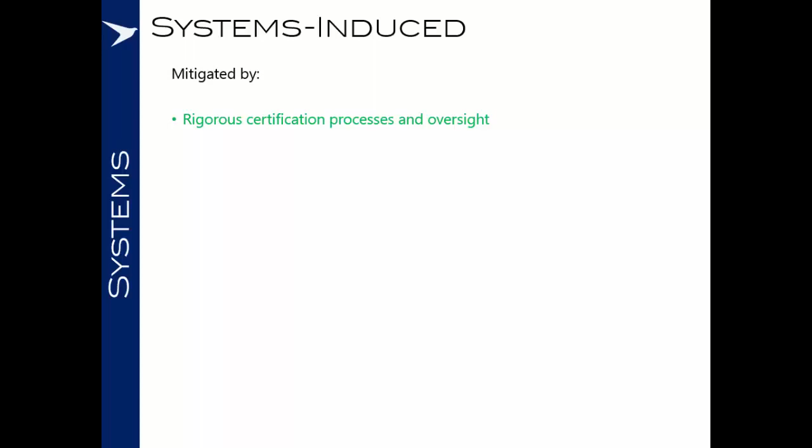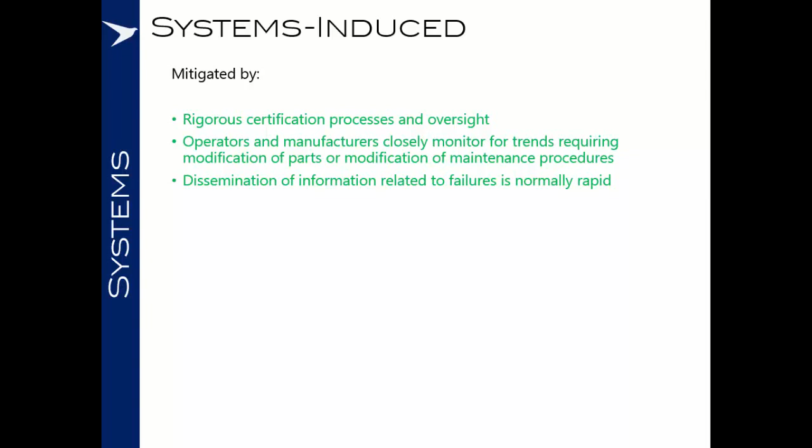Let's now look at the systems-induced causes of upsets. This is where there's something wrong with the aircraft or its systems, and it's led to a condition where an upset can occur. Now these are becoming increasingly rare and are mitigated by a rigorous certification process and a lot of oversight from regulators and aircraft manufacturers. Additionally, operators and manufacturers closely monitor for trends requiring modification of parts or maintenance procedures, and the dissemination of information related to failures is normally pretty rapid.

However, it is a fact of life that failures still occur, and whilst they do, most are survivable if correct actions are taken. So in this section, we'll have a look at flight instrumentation failures, auto flight systems failures, and flight control systems failures and anomalies.

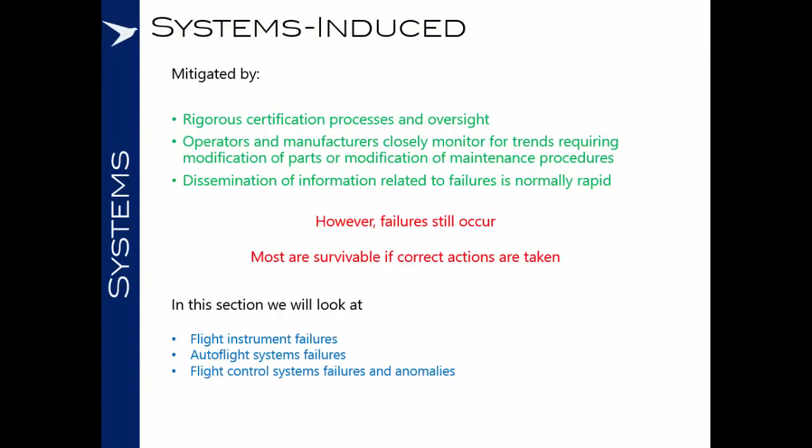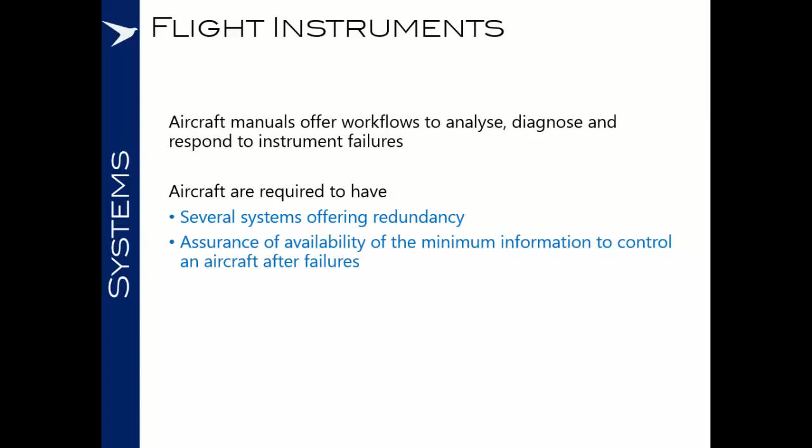Starting first with flight instruments then. Aircraft manuals offer workflows to analyse, diagnose and respond to instrument failures. And all aircraft are required to have several systems which offer redundancy after a failure, and an assurance of availability of the minimum information to control an aircraft even after failures have occurred. So therefore, we should be able to survive any instrument failure through analytical thought and careful diagnosis of the problem.

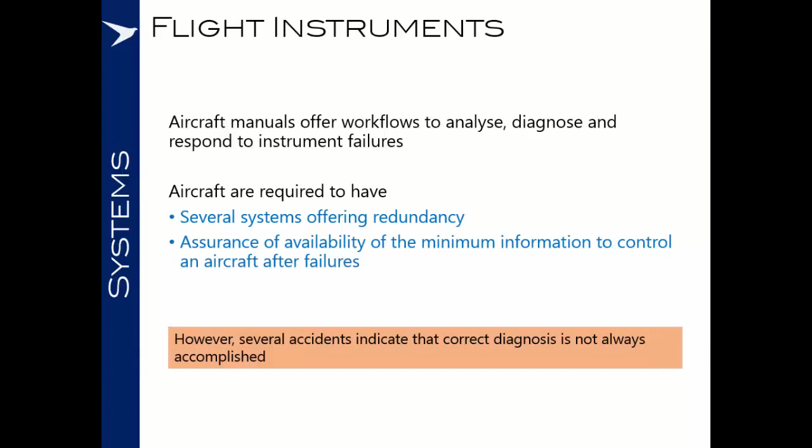However, several accidents indicate that correct diagnosis action is not always accomplished. So the emphasis really in the case of flight instrumentation failures has to be on how are we going to recognise a failure and how are we going to diagnose it.

Moving on to auto flight systems. These feed data from other aircraft systems and monitor your altitude, heading, airspeed and flight path. The accuracy and reliability of these systems has been noted to lead to complacency amongst crews. And additionally, failures can be hard to recognise due to the level of integration with other systems.

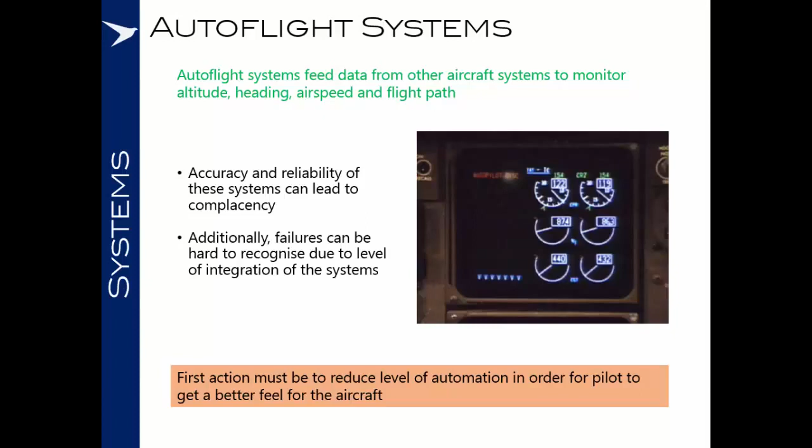For instance, with an auto flight system taking its airspeed reference from a failed airspeed data source, it may be difficult to recognise exactly what's happening. So the first action of an upset recovery must be to reduce the level of automation in order for the pilot to get a better feel for the aircraft.

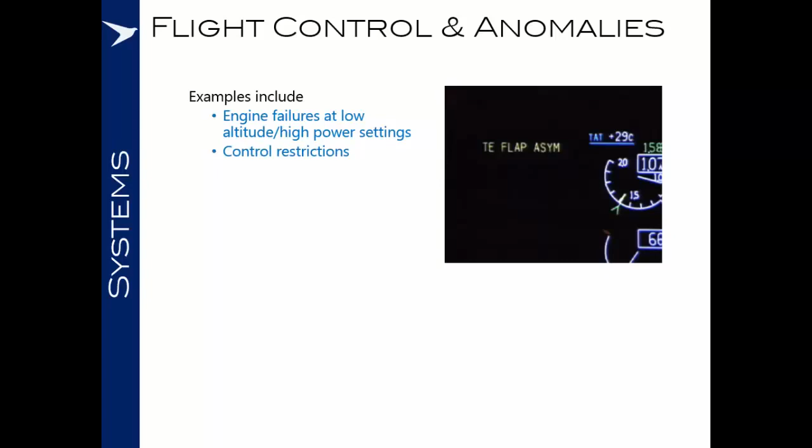Finally, moving on to flight control and anomalies. Examples can include engine failures at low altitude or high power settings, control restrictions, flap asymmetry, spoiler problems, trim runaway, or shift in cargo position. And failures here can vary wildly and cause a problem that isn't instantly obvious as to what is actually going on. Therefore, there is very little guidance that we can give in how to counter or avoid these situations.

And really this is going to depend a lot on your own systems knowledge of your aircraft and its limitations, and your own ability to think laterally around a problem. So have a think about your own aircraft systems knowledge. And perhaps this is a good opportunity for you to think through the information that was given to you in your initial type rating and the notes that you still have probably in your home somewhere.

The key to a successful recovery in a flight control related upset is lateral thinking, good communication, and importantly to maintain a calm cockpit. In this brief then, we've discussed flight instrumentation failures, auto flight system failures, and flight control anomalies. But the key message here is that largely the opportunity is there for you to control the situation in any of these conditions given careful diagnostic and analytical thought, which can only come about from maintaining a calm cockpit.